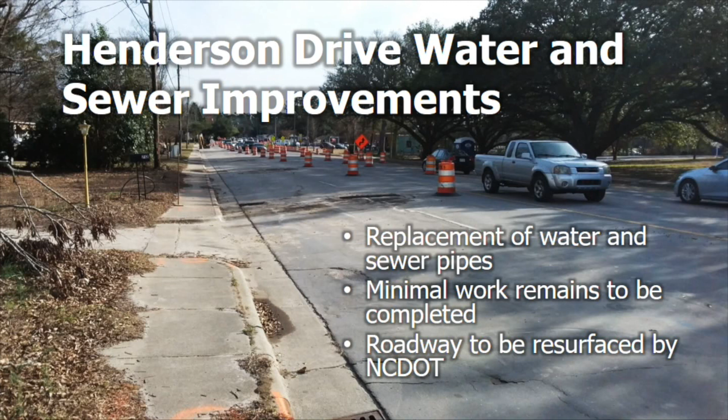This project was to replace utilities beneath Henderson Drive before the road is to be resurfaced by NCDOT. It's gone on for quite some time now. Thankfully, we are in the short rows and should be completing this project in the next two weeks. They have some very minor punch list items still to do. We still have a few manholes we're having some trouble with, but all in all, the project is coming to a close. We anticipate NCDOT coming out in the next year to two years, depending on their schedule, to resurface the roadway, a minimum of six months.

One of the projects that we're about to go out for construction is our ongoing inflow and infiltration rehabilitation project. We've gone through and identified several areas within the city that are in need of some work for our sanitary sewer system. This project is going to reduce the amount of I&I coming into our collection system.

The best means we've found to reduce that amount of I&I is by cured-in-place pipelining, where we go in and basically insert a pipe within a pipe. There's no excavation involved in this process, and it's quick and fast, and we get the end product we're looking for, which is a reduced amount of I&I.

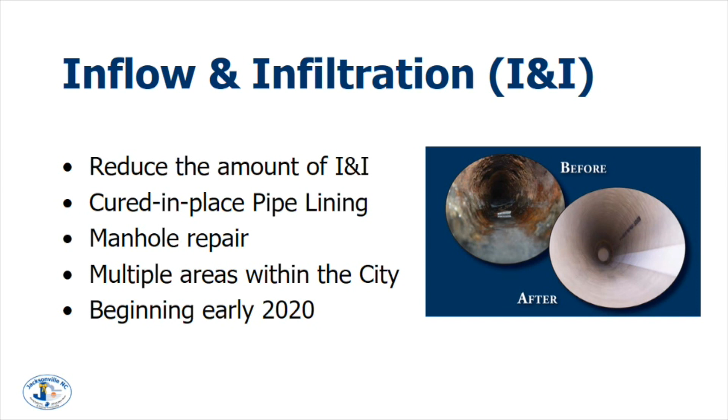Does it take out too much volume capacity? It doesn't, it does take a little bit, but for the most part, as you can see in the picture, the diameter of the pipe that we're losing is minimal, we're talking a half inch at most in most cases, but we're picking that up with less friction in the pipe. So you're not stopping any solids. What's the lifespan on that cured-in-place? Right now we're being given a 50-year lifespan on the new cured-in-place.

Were there multiple areas in the city, and what particular areas were the worst, I guess you could say? So one thing we've found with our I&I projects is we will start in one area, and by the time we are even halfway through design, our lines maintenance has come to find us and say, hey, we have problems here, there, and everywhere. So we are literally all over city limits right now.

We are concentrating in the Triangle subdivision area, Triangle Plaza I believe it's called, but we also have areas in Northwoods and along Western Boulevard. In the Triangle, if you remember there used to be a mobile home park behind the actual shopping center, and the owners of that property have moved all those mobile homes out. Well, all those existing lines are there, and while not all of them are ours, a portion of them are. And that is a key area to find I&I, so that is one of the places we will be focusing.

You asked the question about the pipe. Derek went and got one of the samples. That's actually a cutout of one of our pipes that have been lined. You can see the blue is the original pipe, and the white is the liner they install and then cure. So it's literally a pipe within a pipe. It looks green to me, sorry, blue-green. Well, that's fairly thick, it adds structure to the pipe.

Another project we have in design now, anticipating starting construction soon, is our New Bridge Street infrastructure and streetscape project. This will install a new water line along New Bridge Street from Warlick Street to near the gas station, towards Stratford, basically the Freedom Fountain area. We're also doing a lot of stormwater remediation here. During design we found that all of our stormwater pipes in this area are woefully undersized, so this project will improve that system.

Once we put in the new water and storm sewer pipes, we'll come back with a new streetscape design, which will have new sidewalks and new landscape medians along the roadway. The median will take out a lane, and the roadway will be reduced from 4 lanes to 2 lanes.

The existing lanes are currently only 12 feet wide. The one lane used for travel will be 16 feet wide, allowing for about a 4-foot buffer for cars to back up into traffic and maneuver through it, making a safer movement before getting into traffic. It gives them a little cushion to see who's coming around the car.

Isn't there supposed to be areas where delivery trucks can stop in the median so they're not blocking the street? I use this street a lot, that's why I'm asking. Right here - if you look in between the landscaping, there's a striped area, and the UPS truck, who's infamous for parking in one of the lanes, will be able to pull in there and make deliveries.

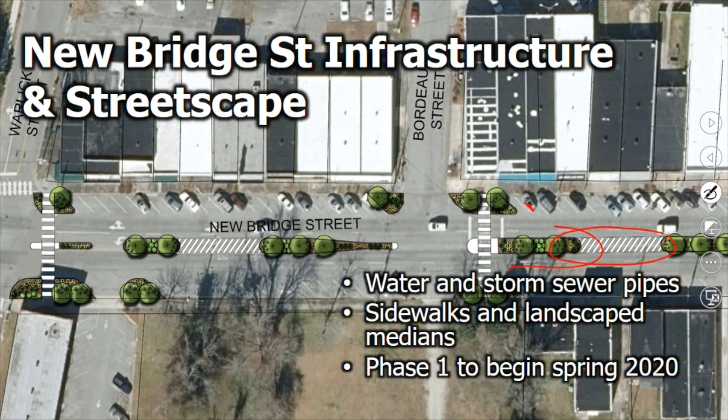They are. The other thing that'll allow is we're gonna keep the angled parking. So if parking spots open up, somebody can come in and make the turn to get back into that angled spot, versus going all the way down to an intersection and trying to make a turn there.

We anticipate getting the final plans soon, and we're looking at starting construction on this project in spring of 2020. That's phase 1, from Warlick Street to Hurst Street, not the entire roadway.

This is one of the areas where we continually have water leaks. I think every time we fix one, a new one pops up. Well, it's an older section too. It is, and it's brittle pipe.

The project was designed to basically eliminate this drainage problem. We've done everything we could up until this point to remediate it, but our new project will reroute a drainage line and put in a larger grease trap to catch the solids. It's a very minor project, but we anticipate starting construction in the next few months.

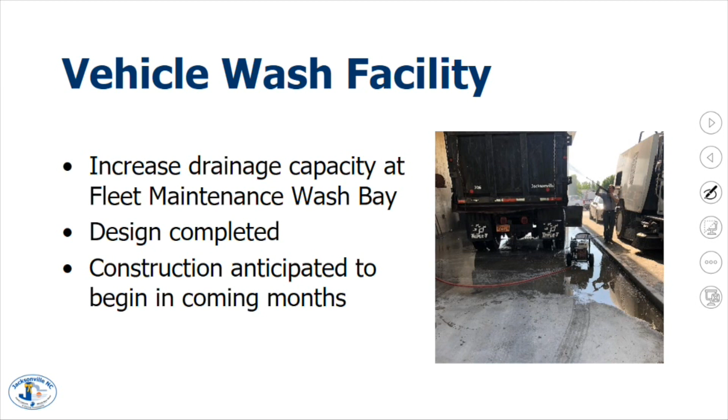They just never thought it was gonna be used this much? I think it was just under-designed from the beginning, and as our fleet's gotten larger and more demanding, we continually have problems - we've actually flooded out the fleet a time or two. So this is an operational issue for water and sewer, where it takes one of our people off his regular route to go over there and help out several times a week.

Our Parkwood Regional Pump Station and Western Trunk Sewer is a large project where we're taking the entire northwest corridor of Jacksonville, city limits of Jacksonville, and sending that portion of sewer out to Landap. We've been in discussions on this project several times, our plans have been finalized, and we're in the final phases of permitting.

We anticipate getting our last permit within the next 30 days, and we'll be going out for bids on phase 1 of this project in the next month or two. Phase 1 is the trunk sewer that will be installed from Western Boulevard along Williamsburg Parkway to Fawn Trail. This is a large diameter trunk sewer, and we're looking at starting construction probably in the spring of next year based on our current scheduling.

This is going to be a very intense project. It's large diameter pipe, we'll have road closures, and people are going to notice it even more. Part of what drives this is we have a lot of interest in the Cypress Creek tract.

It was the Vineyards at one point, Cypress Creek, I think it's Vineyards now actually. It's 380 acres, and they're looking at over 500 single-family homes. So while we can handle the first few phases of that project, in order to meet build out, we're going to have to make some system improvements. So this is kind of the first step to that.

Again, it's all about timing. We're trying to time it with that project. We don't want to be too far ahead or too far behind.

So this is phase 1, how many phases are there? Right now we're showing, I believe, 4 phases. We're trying to do the trunk sewer, this portion will be one phase. The connecting trunk sewer to the pump station will be another, and then the pump station will be its own. The force main out to Landap will be divided into 2, since it has to get across the river.

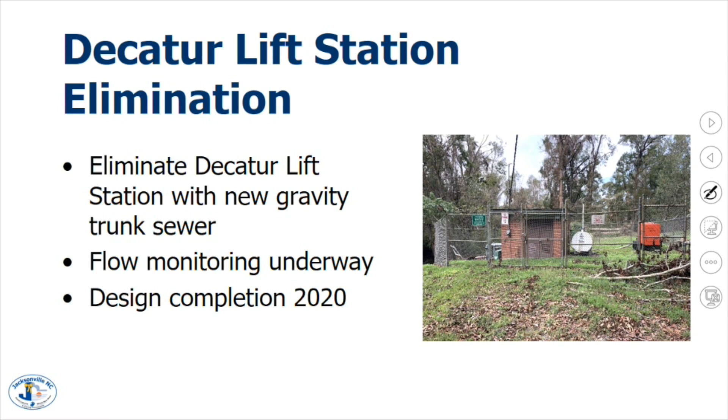We're anticipating completing design next calendar year, and hopefully also starting construction next calendar year as well. And if you'll remember, this is one of those pump stations that when Pete Deaver was here, he was always concerned about, because it's a shallow wet well. The pumps have to be primed, so they're not submersible pumps.

And it sits literally next to the creek, so there's almost no response time. So this will be a major benefit if we can eliminate the pump station and just simply go to gravity sewer.

Our Ellis lift station upgrades project has kind of divided into 2 separate projects. Our immediate concern with this pump station now is to correct the damages that were done during Hurricane Florence. The picture you see here shows the remnants of Hurricane Florence and what it did to the station. Our immediate effort right now is just to do what we can to keep the pump station basically operational at this time, which it is.

But we're doing the short-term fixes, and we're also evaluating a long-term solution for this pump station, which includes possibly relocating the station or other various opportunities for, I'd hate to say, for lack of better terms, flood-proofing the station.

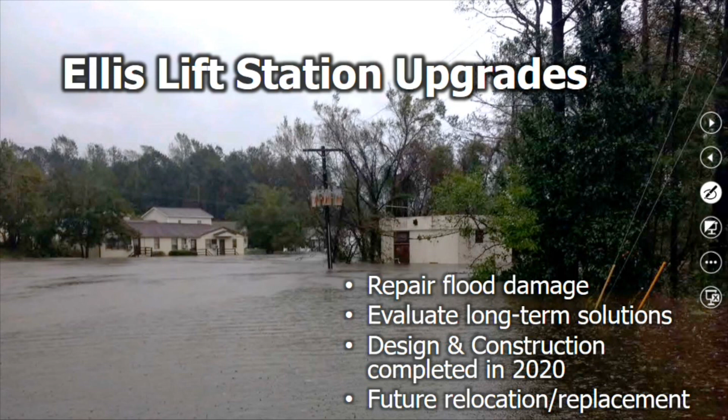Actually, about where this picture is taken, it does not flood, and we own that piece of property. It's right up against Ellis Boulevard. There's some question of whether we can possibly relocate the station. As you can imagine, there's a lot of flow coming to this station, over 1 million gallons a day, and it comes in through 3 different directions, so we'd have to figure out how to coordinate all of that and pipe it further. But there is that opportunity.

One of the things Andrew mentioned is we actually found an economic development grant, because this station serves the industrial area off of Center Street, and that grant is there for resiliency of infrastructure that supports economic development. We've been working with the Economic Development Commission in Jacksonville and Onslow County to get support for this, and we have their support. They're helping with filling out some of the applications, the number of jobs and things we have to submit.

So it's likely the long-term solution could be partially funded through grant funds, but in the meantime we still have to make the repairs from Hurricane Florence, so it's kind of a 2-part project. Unfortunately, part of the challenge in dealing with FEMA is it's not something we can just go do, even though that's why it's taking so long, because we have to jump through certain hoops to even be eligible for FEMA funding to make the repairs. And as you can imagine, it's not a cheap repair.

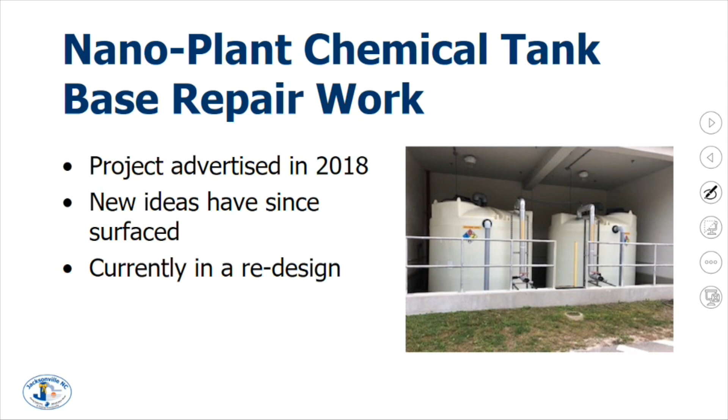Our Nano plant chemical tank base repair work - it's a long name for this project - is basically trying to remediate the areas around the sulfuric acid tanks. Over the years, the Nano plant, which is older than 10 years, has had chemicals in those tanks actually eat away at the concrete supporting the tanks and around it. So we've got a project now that we're hopefully going to be re-advertising shortly to correct the situation at these tanks. This project was bid before and came back well over our engineer's estimate, so we had to go back to the drawing board and figure out a few alternate ideas in order to get this back within budget.

Through the design and preliminary studies of the water plant, we found that the most practical means is going to be to purchase a piece of equipment, a lift, in order to get access to the tops of these trains. The problem is that the grating installed inside the water plant doesn't support the weight of that equipment. So now our project has shifted to an equipment purchase and improving the strength of those grates.

How do you get to the top now? We don't. There's no way to do it. And the problem is there's a lot of plastic piping up there, so it's not like you can use a ladder and support yourself across it. You literally have to - we've even talked about suspending something from the beams to possibly work. Those fan blades alone weigh about 300 pounds each, and those big fans up there are broken, so there's just no way to get to them and get them down.

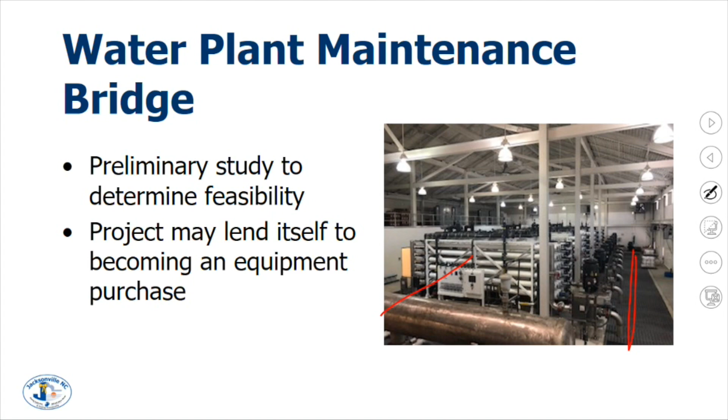The good thing is the front grating you see here is heavy duty. The problem is the grate in the back is not. So we can get in, but the trains are so close together you can't really work from between them. You have to come around, but once you come around, that grating is not load-rated sufficient to handle lifts and those kinds of things.

They've been creative, they've tried multiple things. They've tried sticking one of those fork trucks through the doors and extending the arm up to try to reach in that way. We do have a one-man lift we've used a couple of times, but it doesn't go high enough, and again weight can be a problem there.

So no catwalks across the middle or anything? We actually talked about catwalks, but they're expensive and have to be designed. Like scaffolding - we've actually looked at scaffolding. That might be the only other option, but the problem is when you set it up, you've got to take it down every time you use it, so it's very time consuming.

We can't get to the fans with scaffolding, but we can get to the top of the trains. They don't have any kind of lighter industrial equipment like they use in warehouses? That's what it won't support. Talia actually did a lot of research on that - the problem is it's got to have a narrow footprint, and the more narrow the footprint, the more dense the weight. It's the ability to reach across those trains, so it's a balance between the weight and the length it can actually span.

New pumps, new controls. We might have to do something with the piping. We're not sure what was causing the head pressure problem, but literally when we turned on well 6 or 7, it would reduce the flow from well 1 so much that it would just shut it down. So we've got to overcome some of those challenges, but the great thing is we do have a viable candidate, and they're thinking well 1 will be somewhere in the 400 to 500 gallons a minute range, which is where we want to be.

So that is great news for well 1. That leaves, what do we do with 2 through 5? We've had a lot of internal conversations, and where we're headed toward is a study to look at whether we can drill 1 or 2 new wells at one of those existing locations and just abandon the others. The thought is maybe we can install 1 or 2 wells and get the same capacity that we originally had from wells 2 through 5.

Would the new wells go into the Black Creek? The new wells would be into the Black Creek. And of course, that doesn't adjust our permitted amount. We're still only permitted to withdraw 750,000 gallons a day, so it doesn't adjust our permitted amount. What it does do is allow us to pull from different locations, which is actually better for the aquifer.

The state would like this too, because we would be going from 5 wells all along one street, which for sustainability purposes is probably not the best way to do things, to 1 or 2, maybe 3 at most. There's sufficient spacing to have all 5, but with today's practices we try to spread those out more. If you're drawing from multiple points, it's more even than if you're drawing from one point, where you end up with a larger cone.

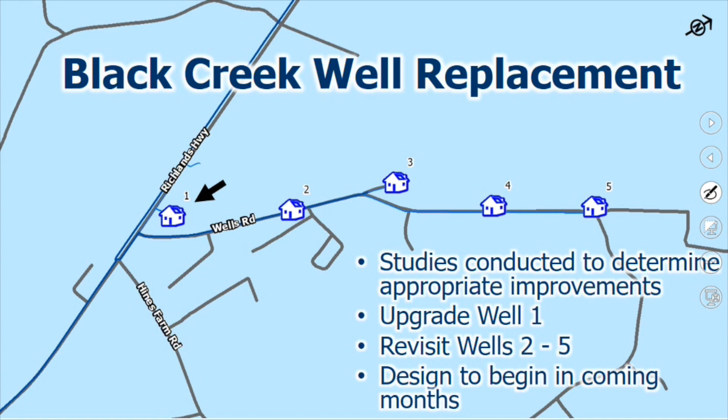Do we have any more Black Creek wells than these 5? We do - we have these 5, which are all located right in the Wells Road area off 258, and then wells 6 and 7, which are closer to Catherine Lake Road. Then on the Gum Branch side of the New River near Rock Creek, we have wells 11 through 18, and those are in pretty good shape.

We're providing some information from the state, and we pulled well 16. The well was in good shape, but the column pipe was not, so we're replacing the column pipe.

That was an unexpected operational expense in Joe's budget. How much water are we pulling from Black Creek right now? Roughly 1 million - yes sir, it's right about 1 million, Wally.

Right about 1 million. We're permitted for an average of 750,000 gallons per day over the course of the year, but we also have a bank, and we're also still working to regain some of our capacity. Everything else is coming out of the Castle Hayne and the Pee Dee, except we have 2 lonely wells in the Pee Dee that don't make up for a lot, but give us something - about 200 gallons a minute each. It's just as good water as the Black Creek, actually, just not a large aquifer, so you don't hear much about it. I typically lump it in with the Black Creek wells.

Thank you. All right, and then the last project is really more of a study. We've talked about this several times - taking the Brynn Marr pump station and redirecting it to the base. We implemented a study to look at the feasibility, the cost, both construction and operational, and then look at different alternatives.

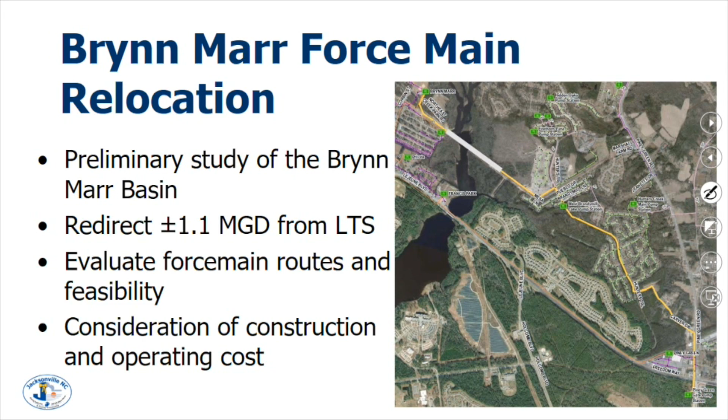This is one we still have internal discussion about. Are we comfortable with the numbers they submitted? How far do we need to carry this? There is a benefit to the base—are there opportunities there? There's even been internal discussion about doing a smaller portion of our system. Those are all things we still have to consider. We don't want to rule out any alternatives, because in the future we're going to be faced with the challenge of how we grow our wastewater system and meet demand. So we're still moving forward, but we're really still in planning—I don't see this going to design anytime soon.

Since you have Holiday City up there and they contribute to that, what's the status of that? They did an internal inflow and infiltration study for their sewer system—their sewer system is private. We were seeing, during high rainfall events, large spikes in our wastewater system in that area. They did an internal study and claimed they removed a significant amount; they had a private engineer do it and submit a report. I don't remember the exact number they said they reduced, but we have not been back out with our flow monitors to verify what we're seeing.

So you don't have anything from, not Dorian, but that thunderstorm three days after Dorian that was basically worse than Dorian? That deluge comes to mind, yes. We saw spikes in our entire system during that. I don't know—we haven't pulled that information for Holiday City specifically.

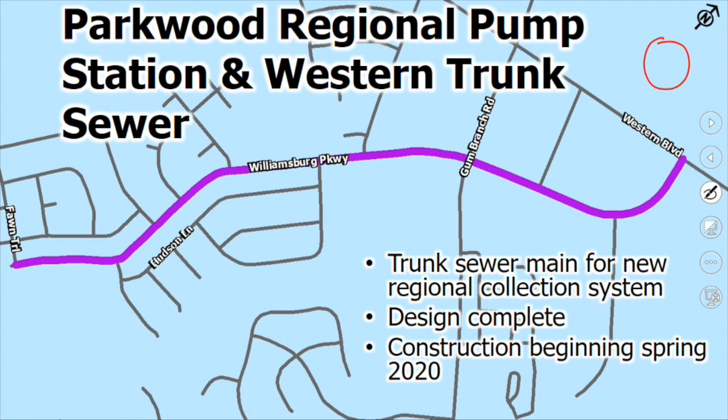This is actually part of that overall larger project. The project's designed, the project's permitted, all with the exception of the DOT permit that says we can work in there right away, which for this section we don't even have to have right now anyway. But that's the only permit that's outstanding. We've actually acquired all of the easements. So literally it comes down to timing. We don't want to start too early, but we're about ready to go if we need to.

How long do you think it's gonna take to get the sewer across the river? Are you talking about just construction wise? If we constructed this all as one project, it would be a multi-year project. My guess, based on what we did with the raw water transmission mains, because the gravity sewer is a little more difficult but similar construction, I would bet it would be an 18-month construction period. And then we would come back behind that to do the finish grading, replacing lawns and streets and those kinds of things. But to get the pipe in the ground and get the station built, I think it's at least an 18-month period.

Will it go under the river? Yes, it'll be a directional drill under the river, and it's a long directional drill. It will be interesting to see, you've got some wetlands there. Yes, the longest one I've done is 1,100 feet, and this would beat that. Oh yeah, this one's going to beat it by a lot. It'll be close to 2,500 feet. Oh, so that more than doubles it. Yeah.